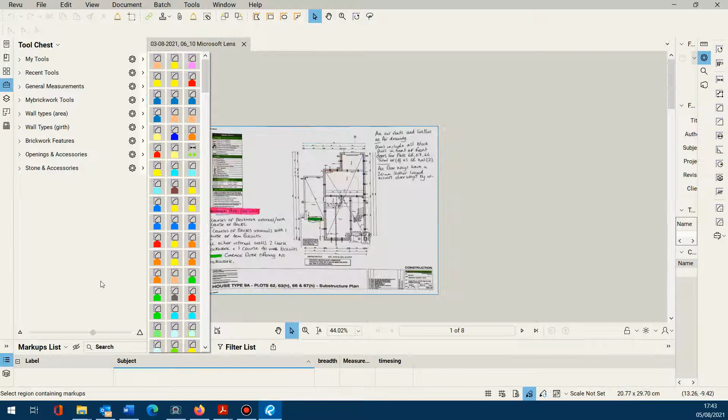So this is generally what I would get from my client. He'll send me a marked up drawing of the plot he's completed, and he'll annotate the number of courses, anything else I need to know about leave downs, what have you. So I'm armed with all that information.

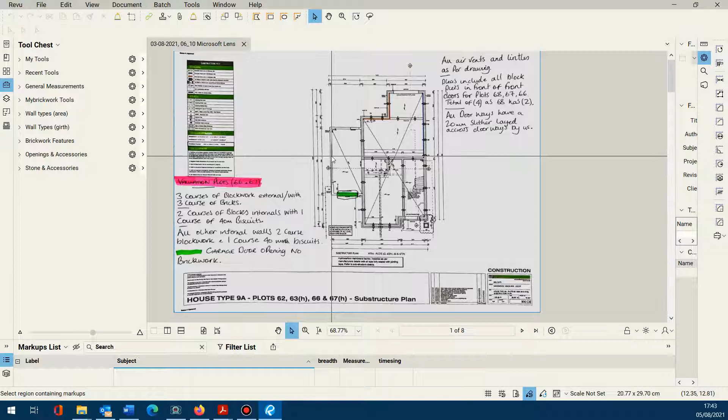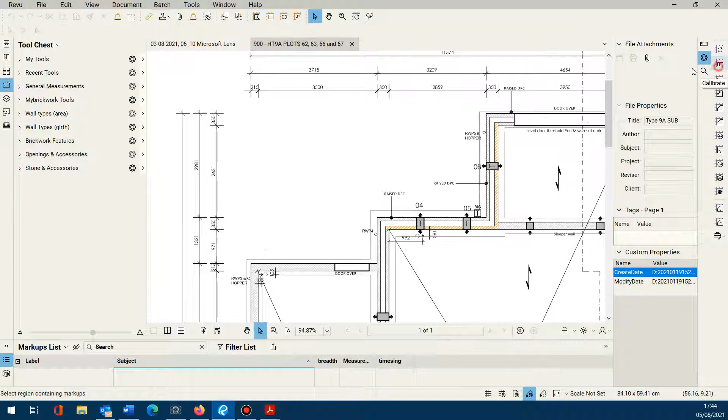What I'll then do is call up this actual drawing, which I believe is here, and we'll set about measuring this. As always, first steps: calibrate our drawing. And as always, check it's calibrated correctly.

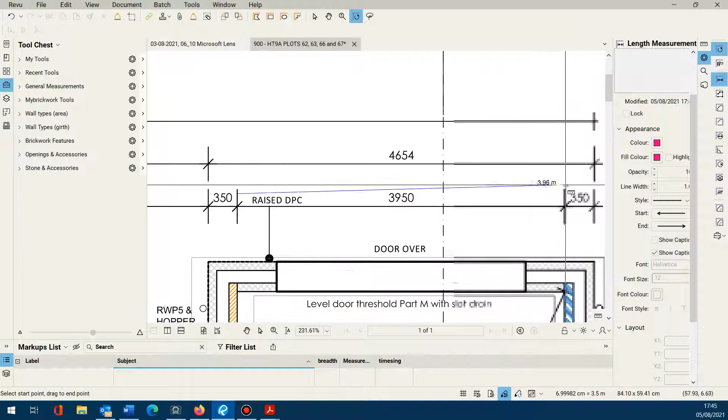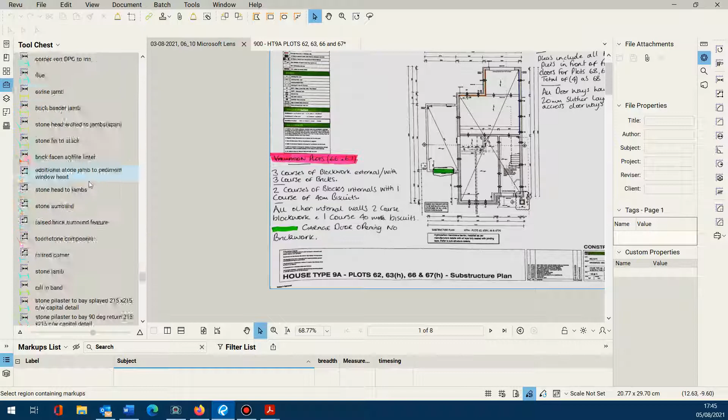3950, correct. And there you can see the 3.95 on the screen. So I know I'm going to measure from this legend that I've been provided with. I've already got the tool set up because I've done this valuation a few times before. So let's jump in. I've got a 100mm block outer skin.

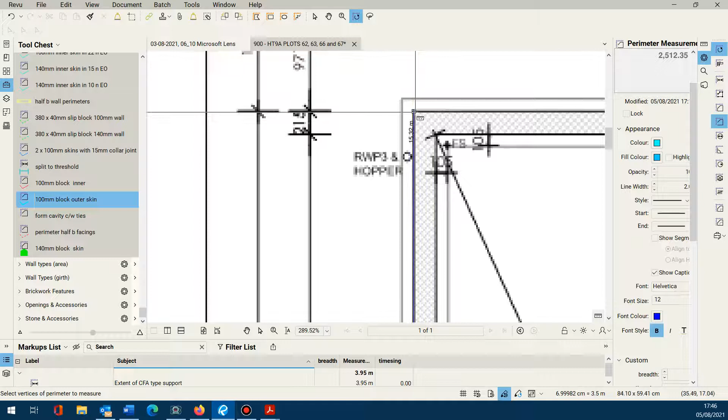I'll just waffle on now. I'm going to take this 215 garage blockwork as 2 x 100mm skins, because from the photograph that's how it's been built. Oops, Control Z will undo the last if you go wrong. Continue on.

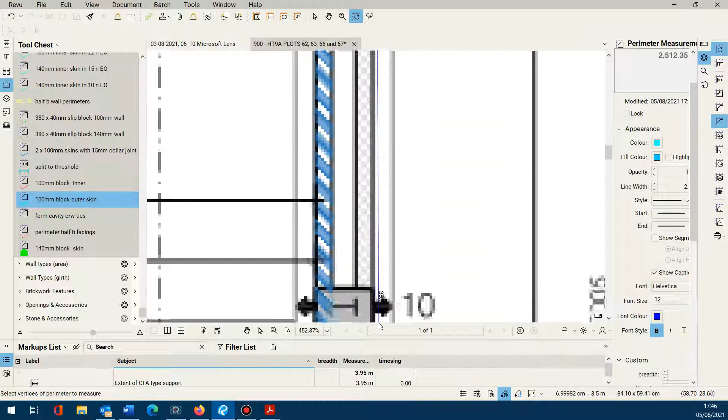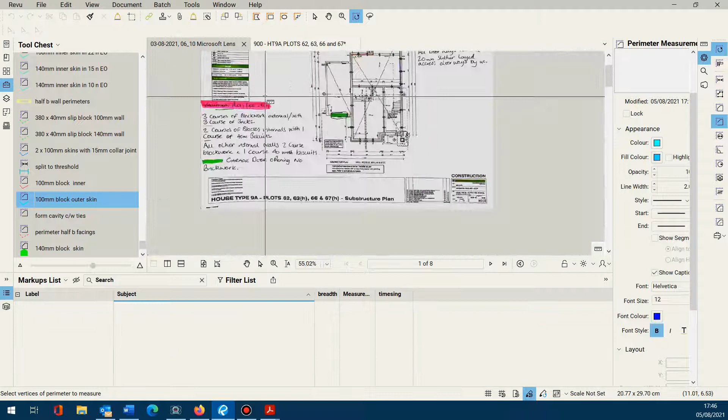We'll disregard this plinth just for brevity in this video. There I have my blockwork perimeter, and looking back at my notes, I've got 3 courses of blockwork externally. So I can just put my height directly in there, and as you see, the way I've got my column set up, Bluebeam's automatically extended it for me.

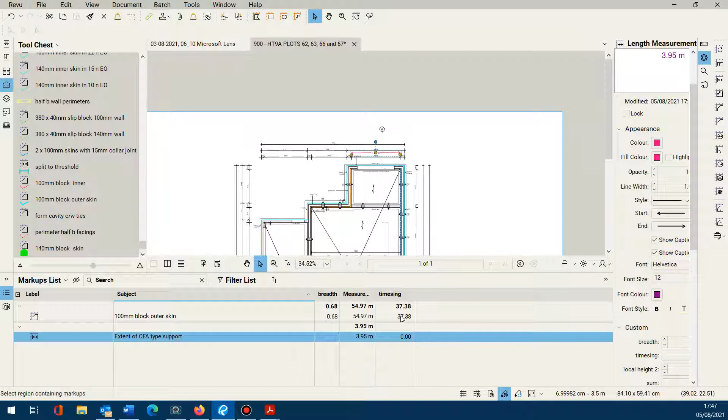Next thing I'll measure is my blockwork inner skin. It's worth just reminding you that I've got snap to markup enabled, and the icon set to one full page so that it scrolls in both directions as you're scrolling. So my 100mm blockwork inner skin.

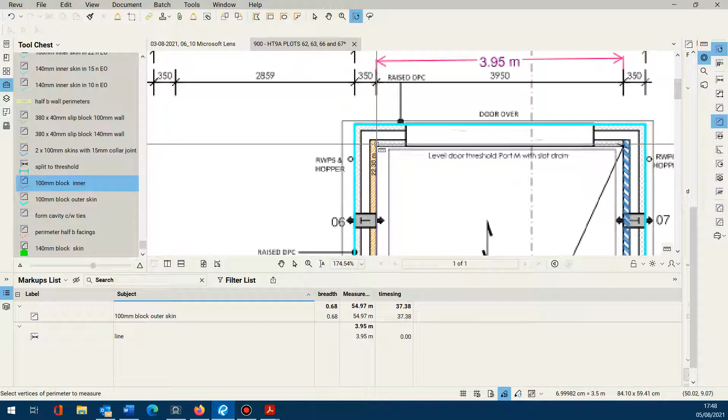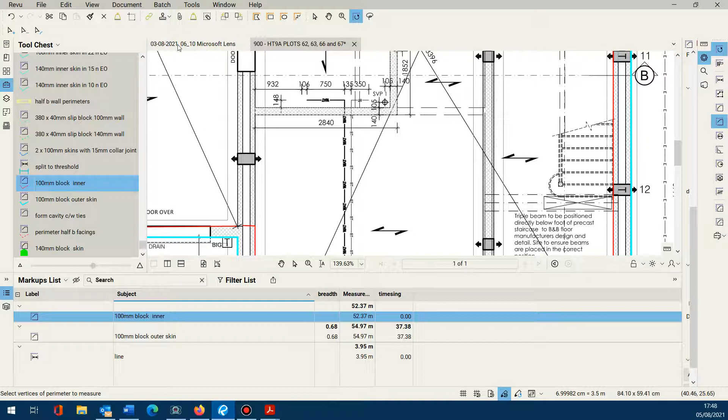And again, I can just plug my height straight in. And again, I know from my notes I've only got 2 courses of internals, so that would be 0.45.

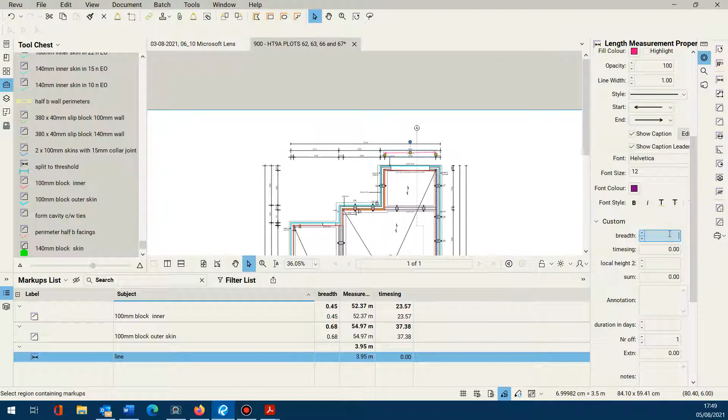Incidentally, if you have these columns set up as special columns, which I've shown you how to do in other tutorials, they'll appear in here and you can actually input the height directly into there as well, which is handy because if you have multiple lines you can select them all and extend them all in one go rather than individually. But I'll show you both approaches hopefully in this video, or if not in another video.

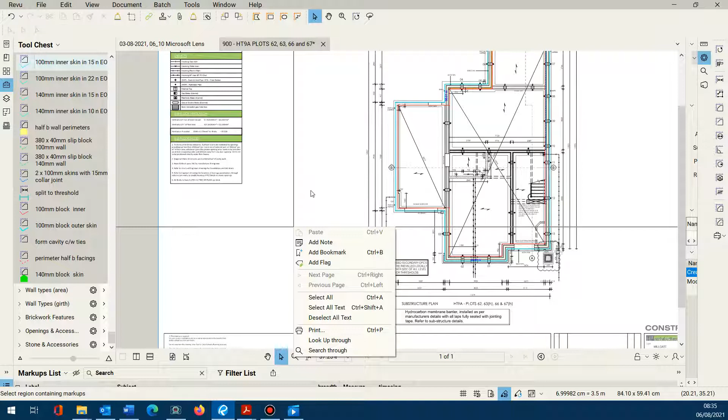What else do I need to measure here? So I'll just crack on and get the rest of this measured. I'll need to measure these internals. So we have a 9-inch wall comprising two 100mm skins tied. We have one there, we have one there, and we have one there.

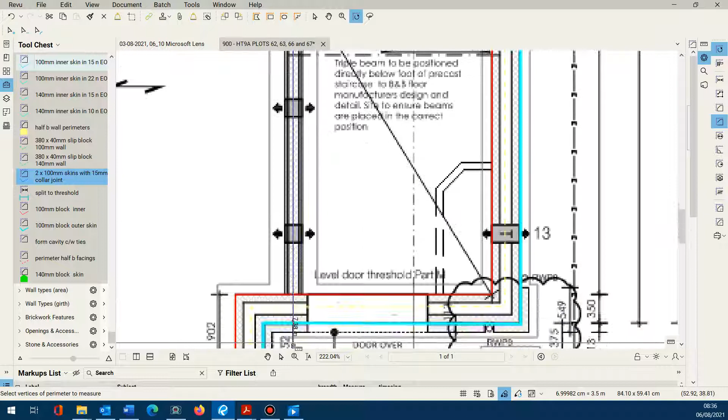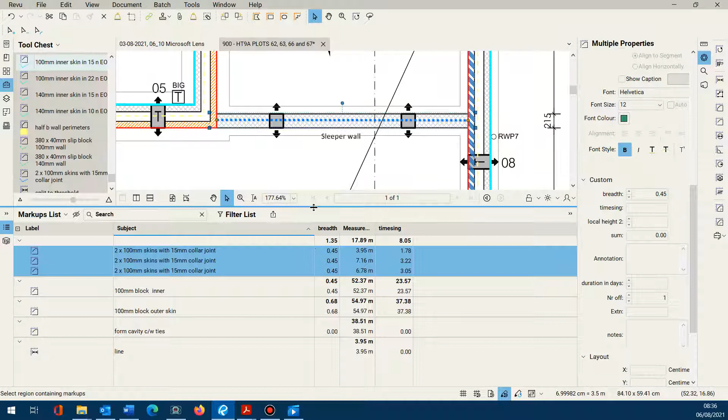And you can see I have the 3 corresponding entries there. So if I highlight all 3 of those by holding the shift key, I can just go down to my custom column. These are 0.45 high, and it will extend them all at the same time as I explained. What else do we have?

This cavity wall here, which I shall measure separately as part of the 100mm block here. It'll be the same rate. And we have a 140 partition here.

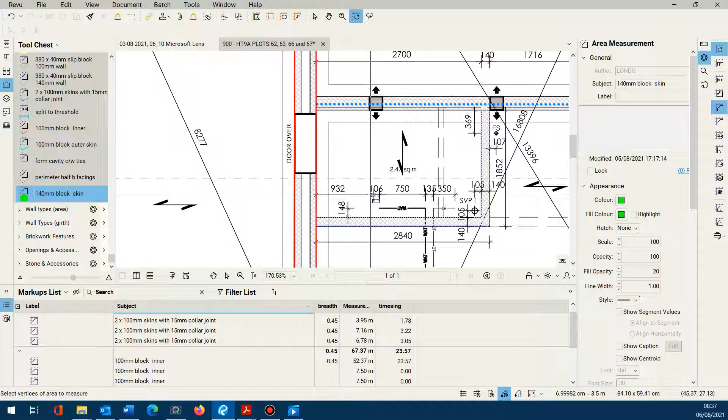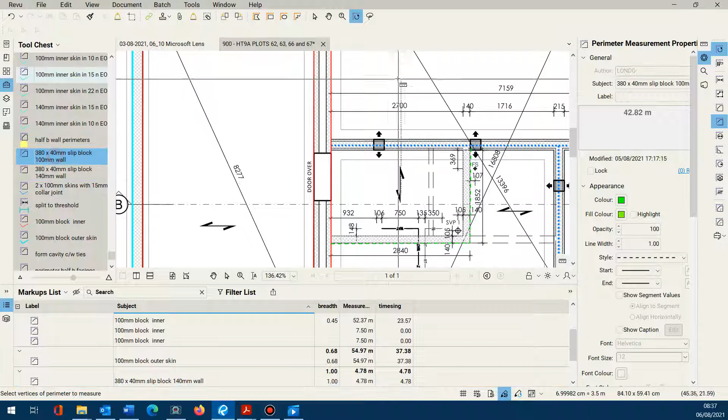Only other thing I need to measure is there's a slip course on all of these internal walls. So if I measure the 140 slip on here, and then I measure the 100mm slip everywhere else, including on those 215 walls, around the perimeter.

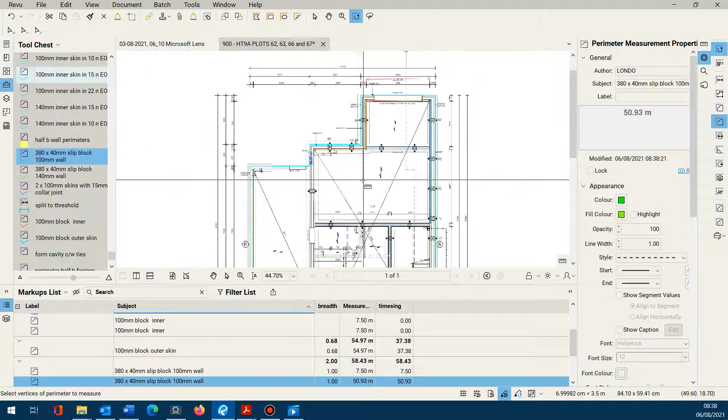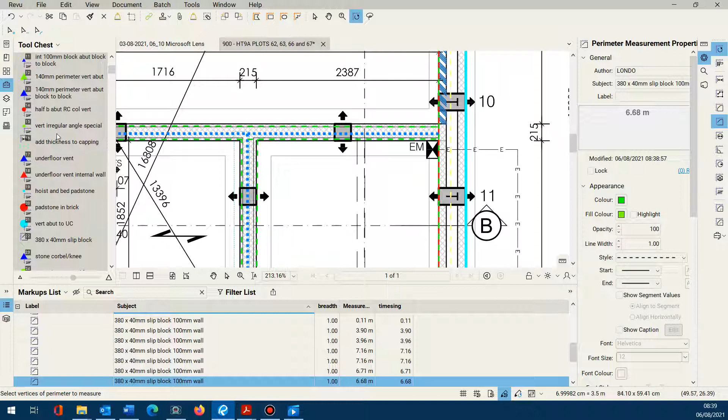Both sides of the 215. And the only other thing I need to do is count the underfloor vents. So we have a tool set as a count tool. If I go around the perimeter and just count my vents.

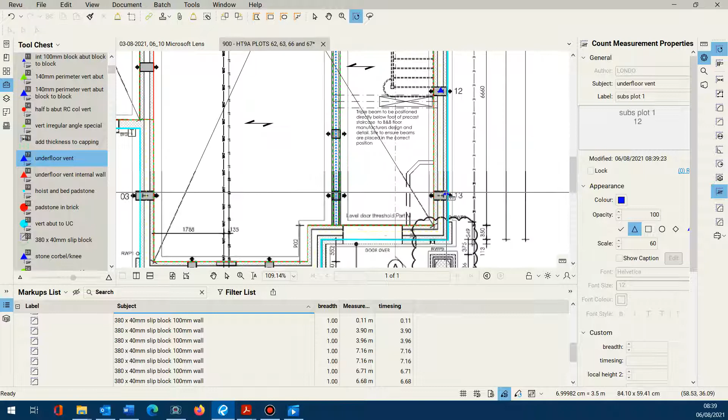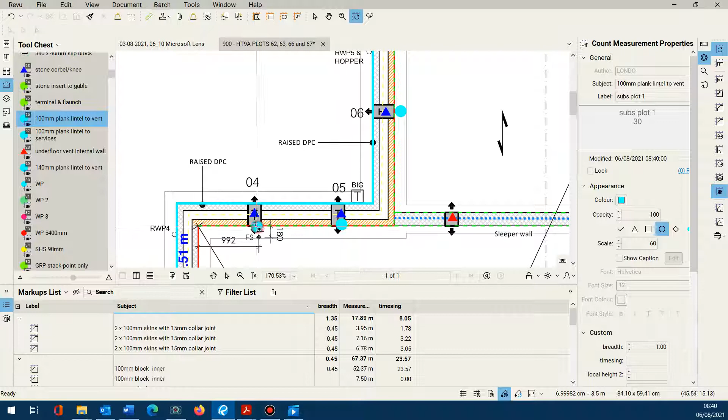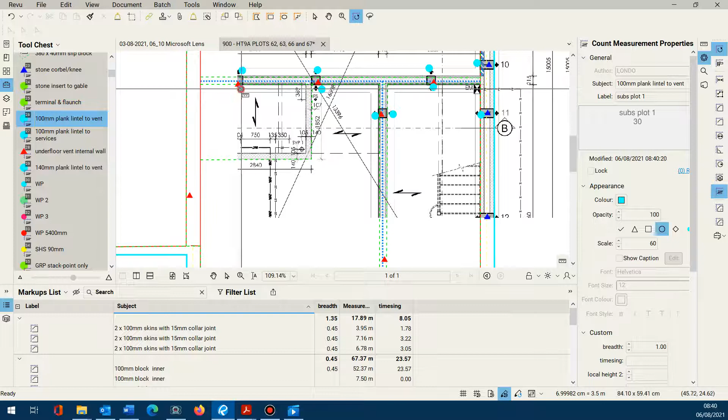I have the internal vents separated out as well. Now all of these will have a plank lintel, even internally, there'll be a plank lintel on both sides. See there, we've got service lintels as well. Grab those in a sec. And it looks like we've got 2 of those.

As I say, I didn't bother measuring the plinth in this exercise just for brevity. So that's everything we need to take.

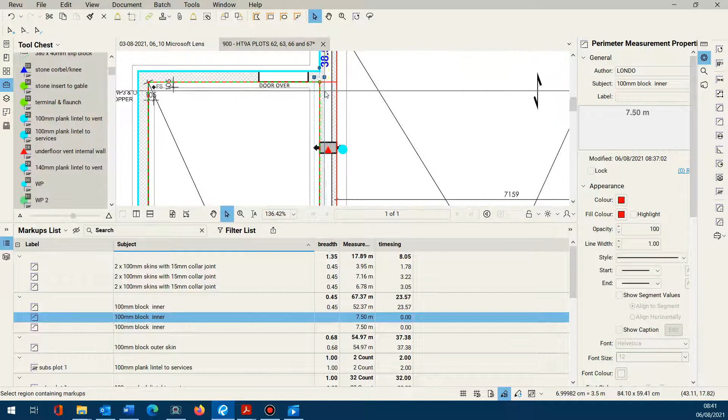So just to complete this exercise, if we go down into the markups list, we continue with plugging in our heights. You'll notice if I highlight a particular entry in the markups list, the corresponding line on screen will highlight with these nodes, so you can identify what one is what. So we know that's an internal, it's 0.45. Again, that's an internal, it's 0.45.

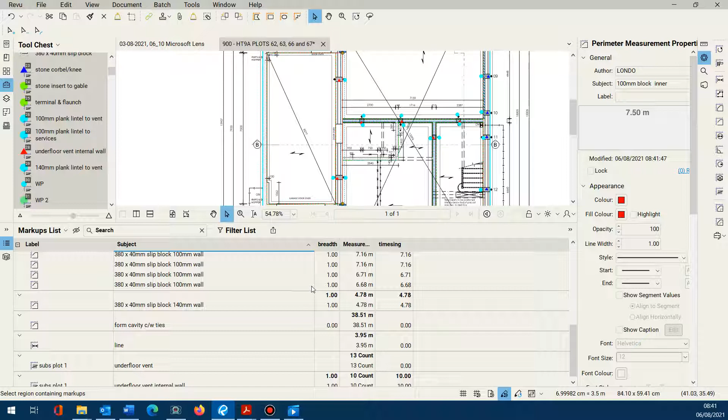Calibration line, it's just a number, so we're just going to extend that by 1 just for tidiness. So pretty much everything is measured.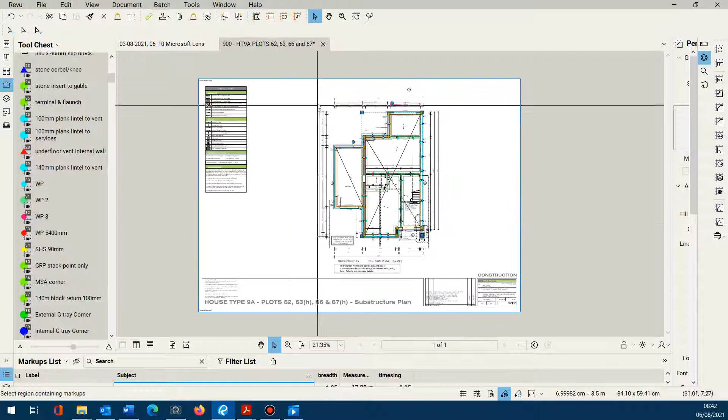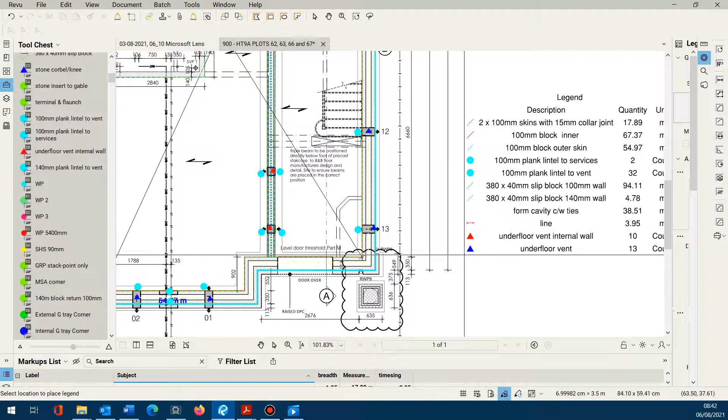Handy feature of Bluebeam also is you can, if you're sending this drawing over to the other surveyor, you can grab hold of all the markups once they're all highlighted, get in on one, right click and click on legend, create new legend, and you'll see that it's appended a ready-made legend to the cursor. I'm going to drag and drop it, and this is quite customizable also.

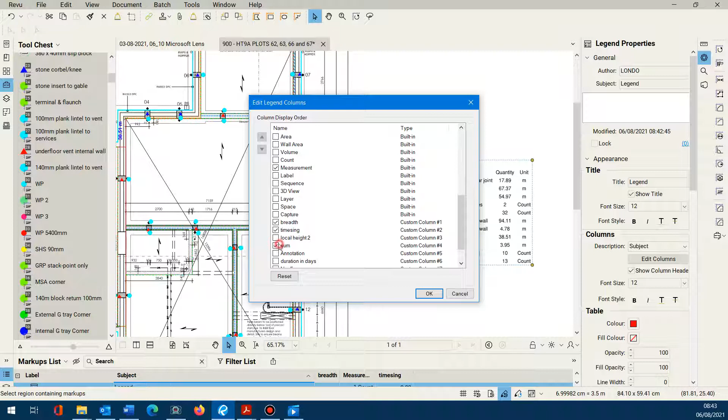You can actually go in and edit the columns on here and tell it what columns you want to see in that list. So we'll stick in, what have we got? We've got the measurement, we've got the breadth, the timesing, the sum. I might be overdoing it here, but it's just an example. I've overdone it a little bit, but you get the point.

It's a handy way of marking up what you need. But what do we do next? We need to get this out into a spreadsheet, and as I've shown you before.

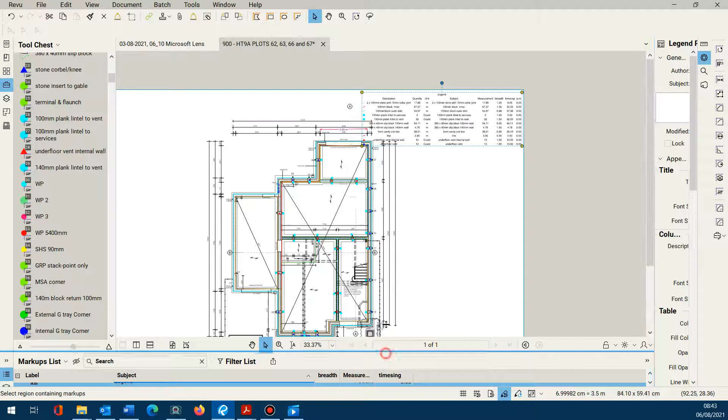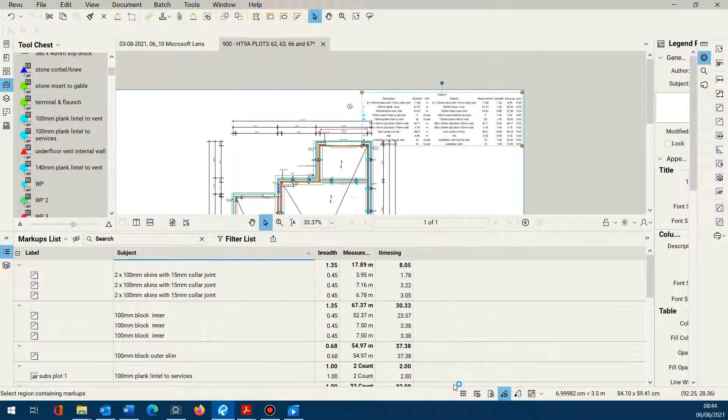We come down to the markups list menu, and there's an icon here. It gives you a summary option. If we click on the summary, we want the CSV summary, and we want to tell it where to save our output. We just want the markups and the totals, column headers. Name the file. And here you'll see your outputs.

Just going to save that. We've created a little tool that assists with the tidying up of these. If anybody's interested in it, just email me and I'll see if I can get you a copy. But it'll only work if you use the columns in the same way that I do. But they're quite easy to have customized.

So let me show you the next step. I'll just browse for it. Back in a sec.

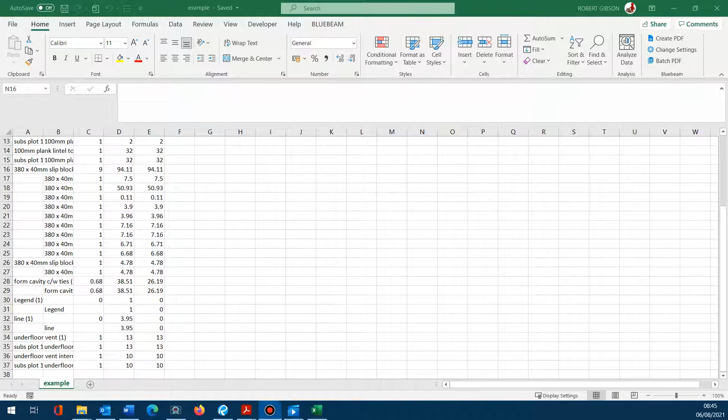So we had a macro created that would assist with tidying up these CSV files. This is it. Basically, you just click on convert, you browse to the file you want to convert, which we've saved as desktop. Now you see that it's tidied up the file nicely for us to import into our valuation template. It just requires a little bit further tidying.

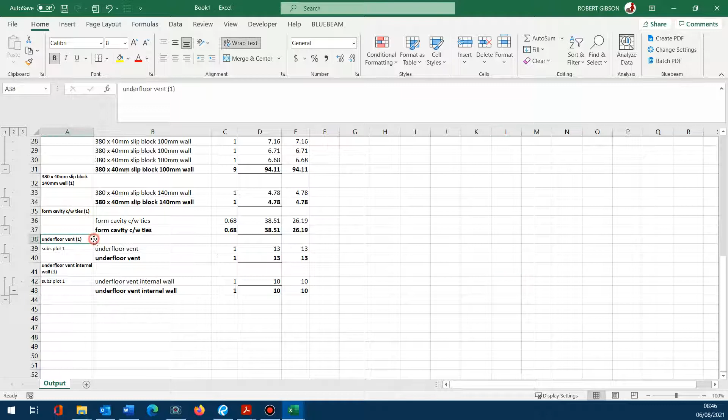And I've explained the anatomy of how this output works, but there you have all your quants output. We don't actually need these calibration lines, let's just get those out. But everything else is in there, and you can go on to further manipulate that in whichever way you see fit.

So I hope that's been helpful and gives you an idea of how you can use Bluebeam practically, and I'll do a few more of these in other scenarios so you can see a little bit more about how I use Bluebeam for taking off, for valuations in general, and you'll pick up tips on speedy annotation and how to incorporate your deducts on plan, that kind of thing. So hopefully see you in the next video.